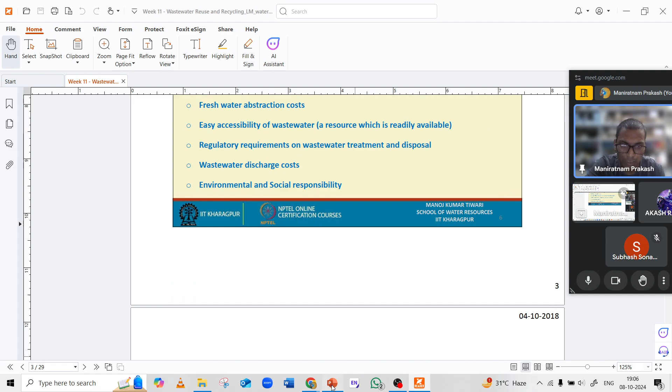Let's go through each and every topic. The first thing, what is the concept of wastewater? If you have any kind of doubt, you can ask in the chat box, or you can unmute yourself and start speaking.

The concept of wastewater reuse and recycling focuses on utilizing treated wastewater as a resource rather than discarding it as waste. Reuse itself means we are not discarding that water, we are just reusing it for some other purpose. This practice aims to address the growing pressure on water resources by reusing water for various purposes, thus reducing the overall demand for fresh water.

We know that for a particular area, they are either dependent upon some kind of river or upon the aquifer present in that area. Those resources have limited water, we cannot always rely on them. So we have to find an alternative, and we know that we generate a huge amount of wastewater just by simple use.

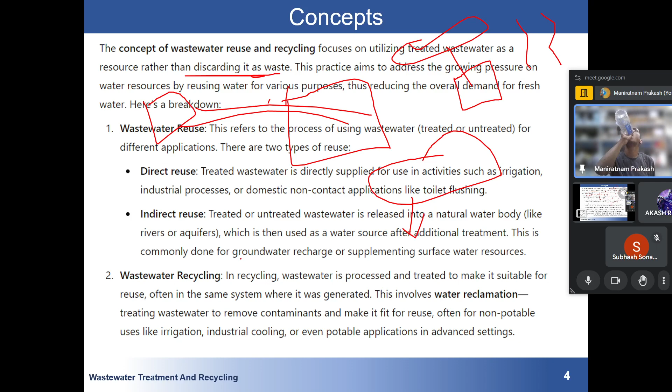So all these are connected, you have to connect the dots, like why we are recycling, why we are reusing. Simple answer is that we have limited resource of fresh water, and many activities starting from drinking to irrigational or agricultural purpose use this fresh water, so there is huge pressure on it. So we have to do something, and the best way is recycle and reuse.

Purpose: to conserve water, reduce pollution, and manage the growing demand in agriculture, industry, and domestic sectors.

Treatment level for recycling often requires multiple stages such as preliminary, primary, secondary, and advanced to meet the standard for different applications. Suppose we want to treat for agriculture purpose, then there is no need of such advanced treatment. But if we want to treat for drinking purpose, then we have to meet some other standard, and a high degree of treatment is required.

So you just remember, you have to keep two three things in mind. One, there is a guidance - first you have to identify the problem, like what is the final purpose of treatment. So our problem statement will be that we have to reuse our water for agricultural or irrigational purpose. Then we have to go through the norms set by the pollution control board or agricultural board, whatever is applicable, and we have to treat our wastewater according to that rule and regulation. So depending upon that, we will have different levels of treatment.

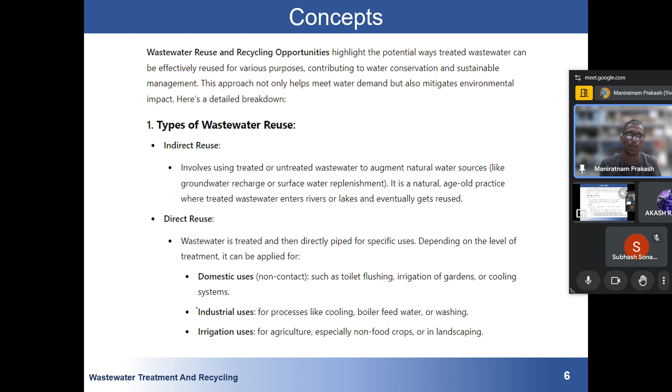Then there is industrial use for processes like cooling, boiler feed water, or washing. Irrigational use is for agriculture, especially non-food crops, or in landscaping. So there are different ways where we can reuse our water.

Potential areas of application - we have discussed which kind of water can be recycled. It's not like every kind of water can be recycled. So the most common recycling done, not just in India but everywhere, is of grey water - water which comes from non-toilet sources, because a huge amount of grey water is being produced.

So organic content in these waters is very less, and we're not talking about urea or toilet waste here. This makes it ideal for reuse. A huge amount of grey water is produced, and this is the easiest form of water to recycle.

Then we have municipal sewage water. We know that it contains a huge amount of organic waste. Municipal waste requires a higher degree of treatment but can be effectively reused in agriculture, landscaping, and even some industrial purposes. While it poses more challenges due to higher organic matter and pathogens, it can be significantly reused when appropriately treated.

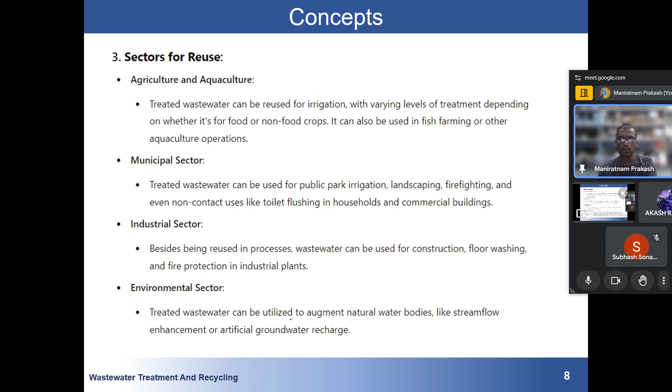Then another point: opportunity with treatment. If we reuse water, it can be used for agriculture purposes, for both food and non-food crops, among other places where wastewater can be reused.

Benefits of wastewater reuse and recycling include pollution control, water conservation, cost saving, and sustainability. Reducing wastewater discharge into natural water bodies helps control water pollution. Water conservation provides an alternate water resource, reducing the demand on fresh water supply. Cost saving - recycling treated water can reduce costs associated with freshwater procurement and wastewater discharge. Sustainability - it contributes to sustainable water management, particularly in water scarce regions.

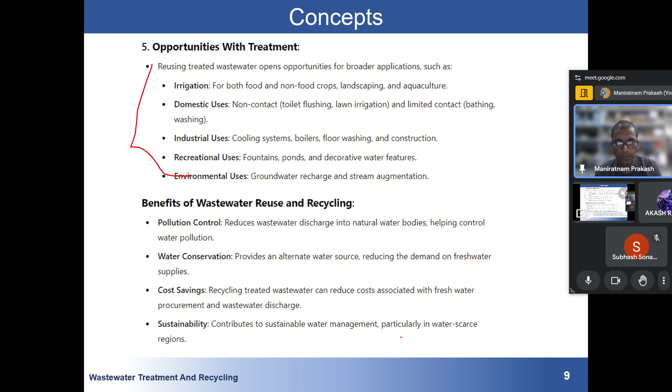There was no numerical question related to this topic originally, but I took an internet source and tried to generate one question. We will go through a cost comparison, depending upon the efficiency at different plants, how much is spent on fresh water versus wastewater treatment, and which option is better.

So an industrial facility produces a certain amount of wastewater which is treated for reuse in three stages. First is primary treatment, and water is collected from here for reuse, then secondary treatment where water is also used, and tertiary treatment, after which some water is also used. The plant aims to reuse as much water as possible for its processes.

So they just want to reuse as much water as possible. For that, they have constructed a primary treatment with an efficiency of 85% in reducing suspended solids and larger particles, and 15% of the wastewater volume is lost in the form of sludge. We know that every time, sludge is produced, a combination of solid and liquid - so out of the incoming water, 15% is converted into sludge.

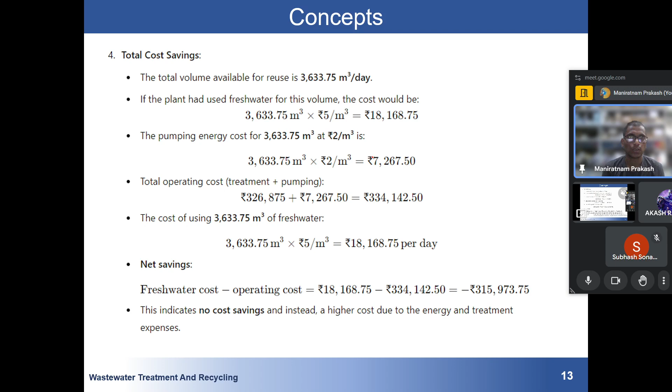So there are several ways to optimize it. Either we can decrease the operating cost, or we can increase the freshwater cost, and things like this. These are something we have to look into.

Coming to another topic, that is potential - we have already seen why it is required, and the answer is simple: we have a limited amount of fresh water. The potential for wastewater reuse and recycling is immense, particularly in regions facing water scarcity or high demand for non-potable water. However, successful implementation depends on meeting several requirements that ensure safe, efficient, and economically viable reuse. Here is a detailed breakdown.

We will be looking into different aspects of why it is required, or what is the potential for wastewater treatment. In India, for example, nearly two-thirds of sewage is discharged untreated, representing a vast untapped resource. Globally, the amount of wastewater generated is substantial, making it a promising candidate for water reuse. Theoretically, 80 to 90% of water used in household, industry, and agriculture can be recovered as wastewater after accounting for losses during treatment, and 70 to 80% of this water can be reclaimed for reuse.

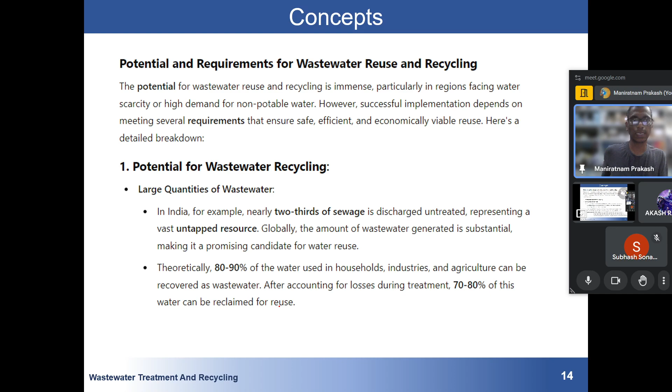So we are producing a huge amount of wastewater, so instead of depending upon fresh water, we can always look into recycling. We know there is need for agricultural purpose, industrial purpose, and municipal purpose. So instead of depending on fresh water, we can just reuse our wastewater.

Treated wastewater can be reused for landscaping, agriculture - we have already seen this.

Another potential of wastewater is environmental benefits. Suppose there is a lake beside your home, and you are discharging your wastewater into that lake. After several years, maybe 2 or 3 years, you will start realizing that the condition of that lake is not so good - it's being degraded. That's why it is always suggested that whenever you are discharging, just treat your wastewater, or reuse that wastewater after some kind of treatment.

Recycling wastewater significantly reduces pollution by preventing untreated wastewater from being released into rivers, lakes, and other natural bodies. We all know that if untreated wastewater is thrown into lakes, then something called eutrophication might happen. We don't want that, because it will degrade our lake with time. It contributes to environmental sustainability by augmenting water resources like aquifers - it also helps in recharging our groundwater.

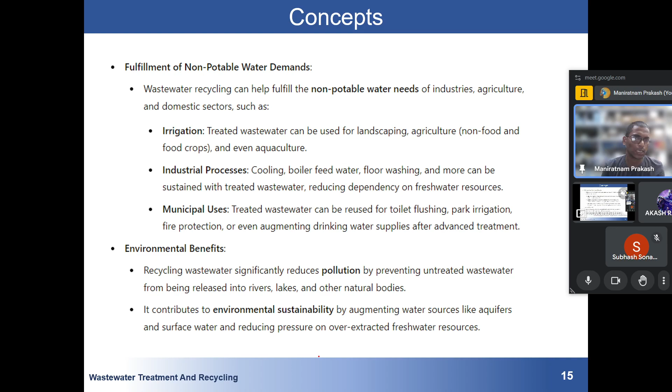Another thing is why it is required. Initially we were discussing potential, like if we treat water, then what we can achieve. Then another question is, what is the requirement? The requirement for wastewater recycling - first, it should meet water quality standards.

Suppose we decide that this water will be used for drinking purposes. Then we should define what treatment is required - at what degree of treatment should we go so that the water can be reused for drinking. Appropriate treatment for wastewater must meet a specific water quality standard for the intended use. Different applications, like agriculture, require treating in that particular way, and whatever instruments or facilities are required to treat water for agricultural use must be available.

This may require different levels of treatment, ranging from secondary to tertiary treatment. There are regulations and guidelines from bodies like the pollution control board, government, and international organizations like WHO and US EPA, which set strict regulations for water use, ensuring public health and environmental protection. For instance, WHO guidance states that if you treat your wastewater and want to reuse it for some particular purpose, it should meet certain guidelines.

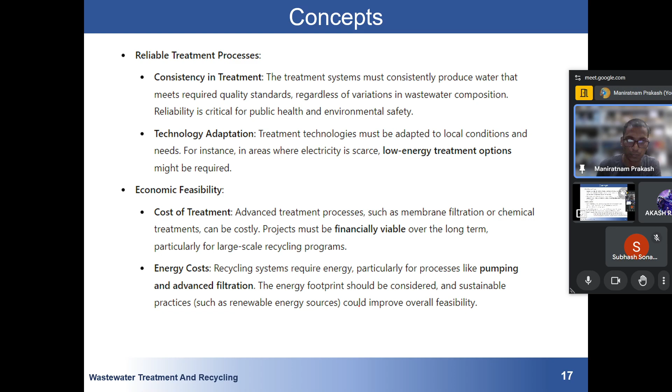Economic feasibility should also be there. Advanced treatment processes such as membrane filtration or chemical treatment can be costly. The project must be financially viable over the long term, particularly for large scale recycling programs. We have seen an example where the treatment was not cost effective. Energy cost means that a huge amount of energy should not be wasted. Recycling systems require energy, particularly for processes like pumping and advanced treatment, so the energy footprint should be considered. Sustainable practices could improve overall feasibility.

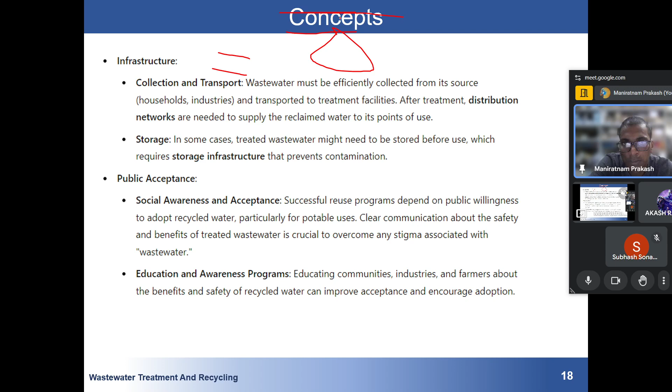After treatment, there is another requirement - infrastructure. Wastewater must be efficiently collected from its source and transported to the treatment facility. After treatment, distribution networks are needed to supply the reclaimed water to the point of use. So there should be either a pipeline or a proper canal beside the agricultural field so that water can be easily circulated from the channel to the field. In some areas, treated wastewater might be stored before use, which requires storage.

Another problem with wastewater - suppose someone tells you that wastewater produced at your home will, after treatment, be supplied back to your home for some purpose. Generally people avoid these things. This is just a mentality of people - they just don't want to accept it. So there should be public awareness that water which has been treated safely can be used without any hesitation.

Suppose I plan to treat water for drinking purpose, and when we supply it, nobody is using it—then there is no point of treatment. Now suppose in a village I constructed a treatment plant for irrigation purpose, and people are not using that water just because it was wastewater. Even though it is treated wastewater, people still don't use it because at some point that water was wastewater. So social awareness and acceptance is needed.

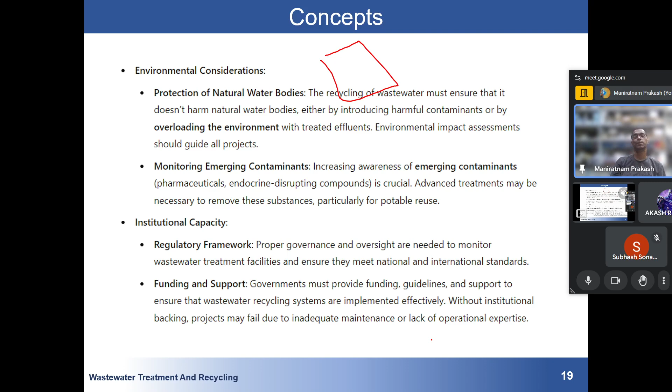Funding and support: the government must provide funding, guidance, and support to ensure wastewater recycling systems are implemented effectively. Without institutional backing, projects may fail due to inadequate maintenance. Proper funding should be there, or else there will be no maintenance cost and we might face a loss.

Here is an example of requirements in a municipal sector wastewater recycling project. For a city aiming to recycle municipal wastewater for park irrigation and industrial use, the project would need a treatment plant capable of producing water meeting the required standard for irrigation purposes. Then pipelines should be there to transport the treated water to public and industrial zones, along with public acceptance campaigns and regular monitoring.

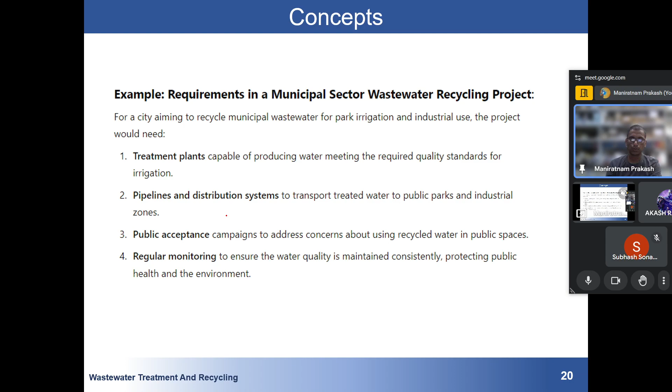We know there are different agencies: WHO, the World Health Organization; US EPA; and in India, we have CPCB. Now we will look into the different regulatory guidance for wastewater reuse and recycling.

Guidelines for wastewater reuse and recycling ensure that treated water is safe for public health, meets environmental standards, and is fit for its intended application. These guidance are developed by international organizations like WHO, US EPA, as well as national and regional authorities. Here is the detailed explanation.

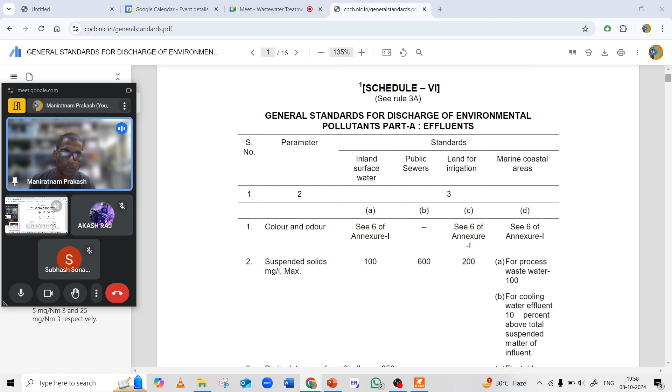See here, now suppose there is some treatment plant. I hope you are all able to see my screen. So suppose if there is some treatment plant, the wastewater can either be discharged on surface water, or discharged in public sewers, or used for irrigation, or discharged into coastal areas.

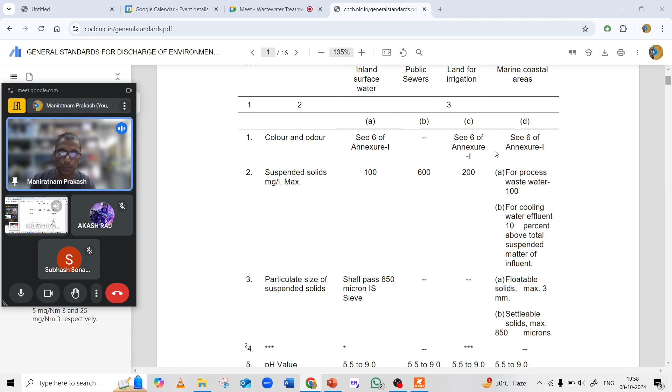For that, there is a parameter for each and everything, like starting with the color. There should be some particular color, then the amount of suspended solids should be this much. If I'm talking about irrigation purposes, the maximum suspended solid should be 200 milligram per liter. Then pH should be between 5.5 to 9.

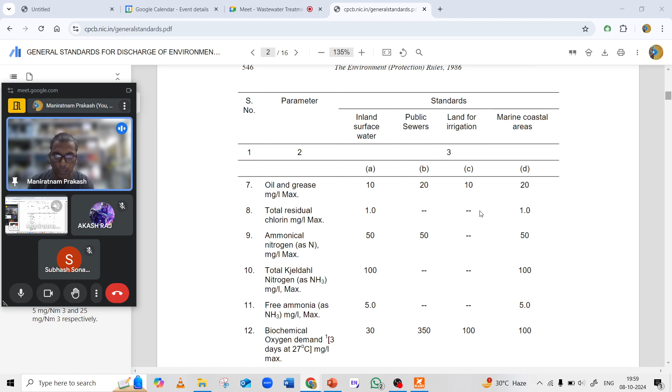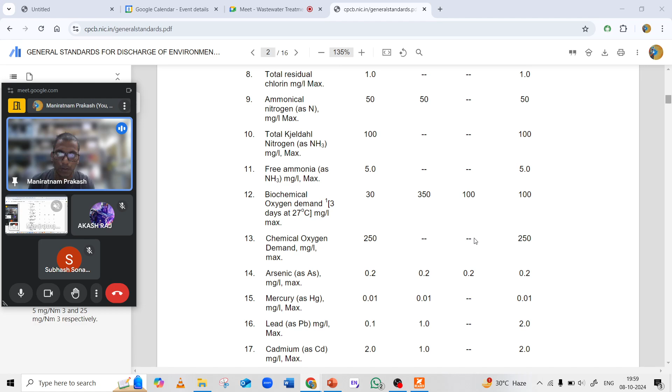For irrigational purposes, BOD should not be more than 100. There should be some limit for COD also, because if BOD is there, then there should be some COD also. Arsenic should be this much. So you can see there is a limit for each and everything. If that is being maintained, then that water can be discharged into that particular area.

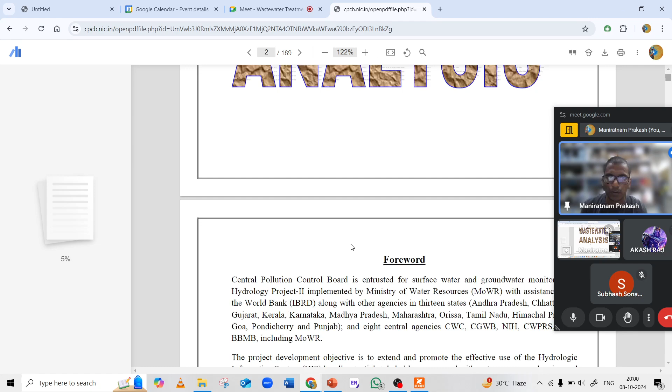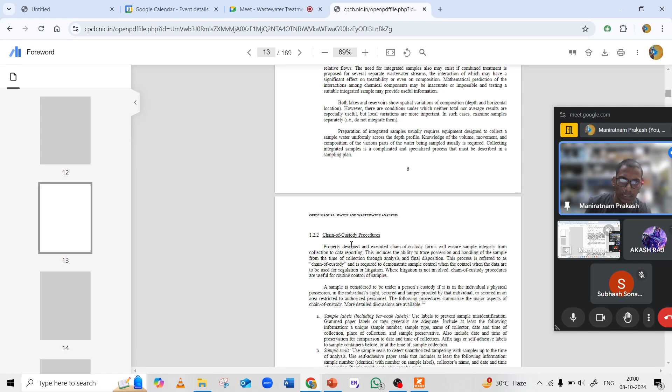It is generally followed in some places, but not in others, so it's all dependent. There are many reports you can check for guidance and analysis. This is also a report by CPCB. I think this report shows how samples were collected and how different analyses were done.

Similarly, we have zero liquid discharge, ZLD policy, enforced in many industries, particularly water-intensive sectors like textile and pharmaceutical. This mandates complete reuse of wastewater within the industrial facility. The Ministry of Jal Shakti promotes water reuse in agriculture and encourages it. So these are three different bodies which regulate wastewater treatment in India.

Then in Australia, similar to India, they have the Australia National Water Quality Management Strategy, NWQMS, which provides strict guidance for wastewater reuse, focusing on managing water scarcity. Public health safety is prioritized. Please zoom the slide.

One minute. Is it okay? Most are different people, the layout is all different. Hello, the layout is different. Is it visible now? It is not visible. I don't know what to do. It's maximum, I have zoomed 100%. It should be visible now. It is very small. I will try to restart. Okay, now it is out. Just restart. Is it visible now? Yes, it is visible now.

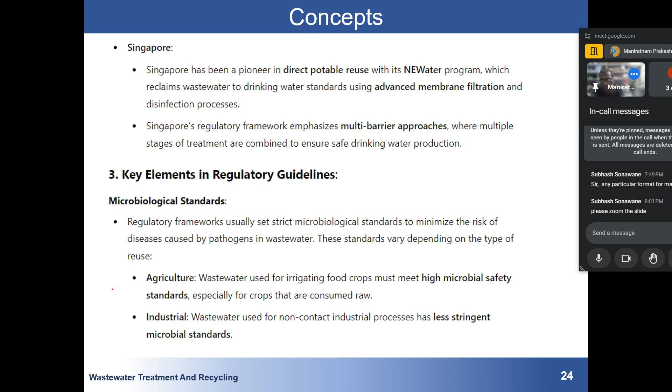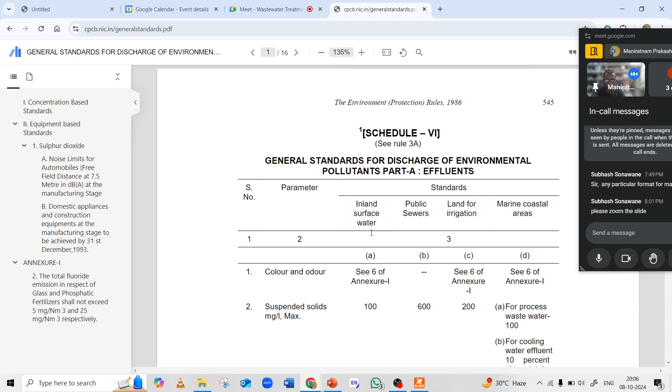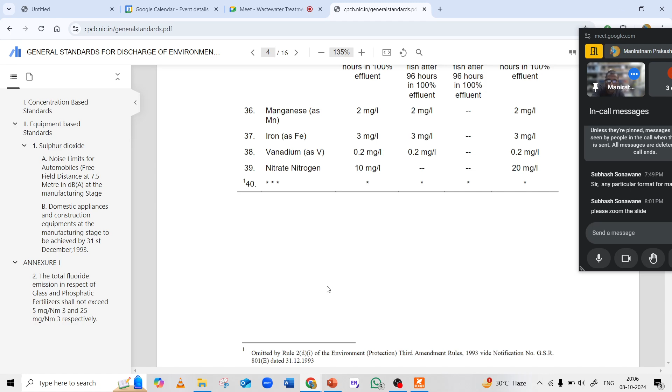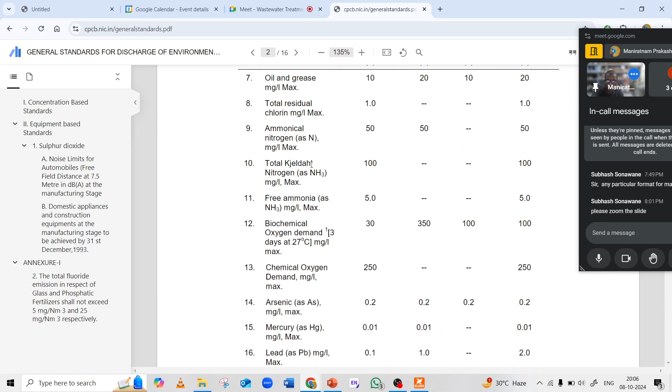In this report, you will see that depending upon the reuse, suppose I want to discharge water onto land or elsewhere, there will be different limits. For pathogens, it will be in the form of coliform. There's also a bioassay test - you can see 90% survival of fish after 96 hours, 100% for another case. I don't recall the exact coliform or cadmium figures, I might be looking at other forms, but remember there are limits for everything - if you are discharging, there is a specific limit that should be followed. There are limits on biological parameters also.

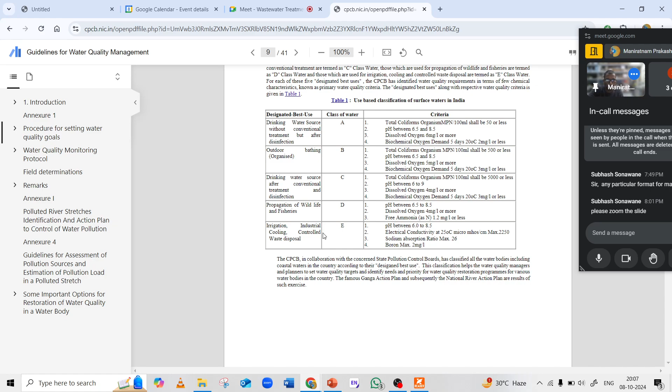Water quality parameters - I'm not able to find it right now, but you should have an idea that there should be some microbiological standards and these things.

Then we have chemical standards. We've already seen that several metals are present, like arsenic, chromium, cadmium, and these should not exceed limits because that will directly or indirectly affect human health. If soil gets contaminated, it will destroy the soil also. We've also seen that nutrients, the presence of nitrogen and phosphorus, will cause eutrophication. Then persistent organic matter can accumulate in the food chain, posing long-term environmental and health risks. So this is another problem - some chemicals get accumulated and cause further issues.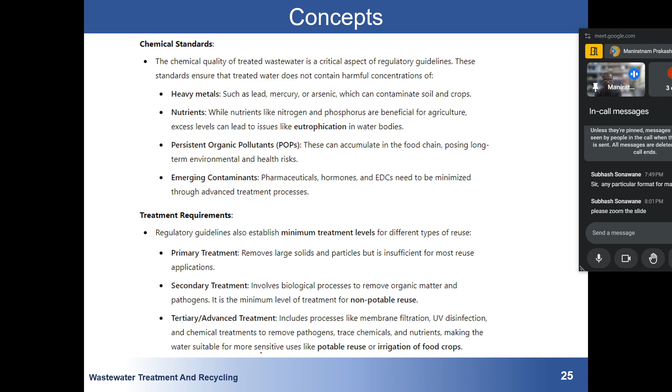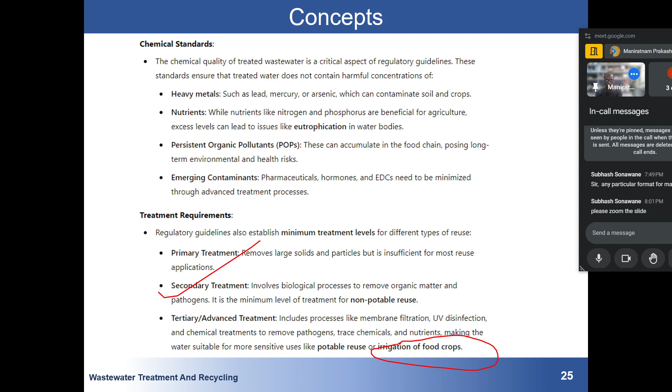Then treatment requirement - we've already seen primary, secondary, and tertiary treatment, depending upon the kind of use. Generally for non-potable use, where we don't want to drink but just discharge for irrigation purposes, secondary treatment is usually sufficient. For irrigational crop products, you can see there is tertiary treatment, but that also depends on what kind of crop is there. So it's all relative.

Again, we have discussed that people should be made aware that this water can be reused, and there should be institutional capacity for reporting, so one should always be checking that wastewater is being treated properly or not.

Now coming to this important topic: centralized versus decentralized recycling of wastewater. As the name suggests, there will be a central recycling facility and a decentralized recycling facility, so I will go into both one by one. When considering recycling of wastewater, two primary systems are often discussed: centralized and decentralized recycling systems. Each approach has its own advantages and challenges depending on factors like scale, cost, environmental impact, and feasibility. Let's explore the key differences between the two, their features, and where they are most applicable.

So, centralized wastewater recycling system. A centralized system involves the collection, treatment, and reuse of water at a large scale treatment facility. Note the term large scale. Often located far away from the point of wastewater generation, it serves large urban areas, industries, and municipalities by managing the wastewater of an entire community. This is the most common setup we have seen.

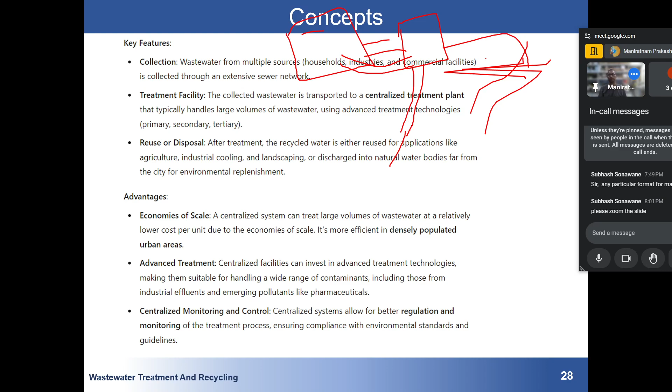Now, economies of scale - a centralized system can treat large volumes of wastewater at relatively lower cost per unit due to economies of scale. It is more efficient in densely populated urban areas. So we know that if there's a large population, this will be a good option.

Advanced treatment: centralized facilities can invest in advanced treatment technology, making them suitable for handling a wide range of contaminants, including those from industrial sources.

So as we know that when we are collecting a huge amount of waste, there are high chances that a large number of contaminants will be there in wastewater. So depending upon the funding, generally they have enough money so that they can treat their water at an advanced level.

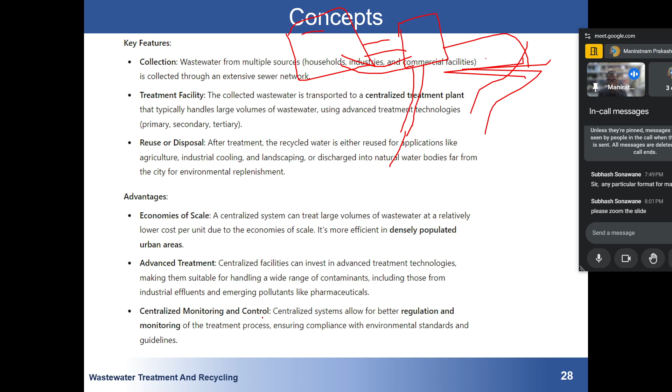Now, centralized monitoring and controlling should also follow some rules and regulations. Now there are disadvantages also. High infrastructure cost is there, so you can see, suppose for a whole Kanpur city, I'm just giving one example.

Like for your whole hometown, suppose there is a small village or hometown of 1,000 houses, at each house there will be some production of wastewater, and they get collected at one point. So treating that much amount of wastewater will be costly. A large amount of facility is needed, so building those facilities is challenging and costly. A huge amount of cost is required.

Energy: to operate the different units, a huge amount of energy is also consumed. Environmental impact: a large centralized system can have negative environmental effects. So we know that, these are all known to you.

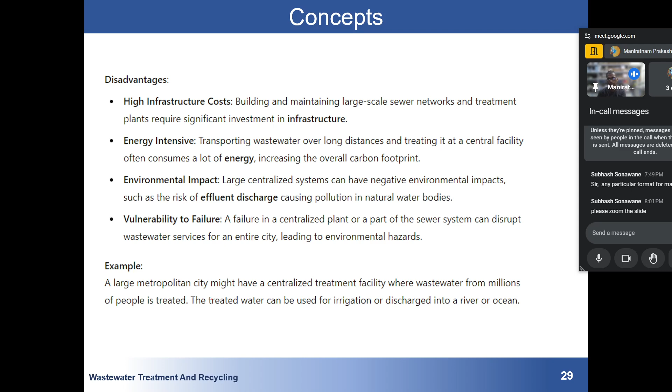Example: a large metropolitan city might have a centralized treatment facility where wastewater from millions of people is treated. The treated water can be used for irrigation or discharged into a river or ocean. Then we have decentralized. We have all seen this; key feature is on-site treatment.

Wastewater is treated close to where it is generated, either at household level or in a small community. Scalability: decentralized systems can vary in scale, from a small system serving a single household or building to a larger system handling the wastewater of a community or industrial park.

Localized reuse: the treated water can be reused locally, for example... we have seen all these things. Okay, now it will be the opposite of the centralized thing. As it is small, we know that we have to treat only my own waste, then there is no such cost investment.

So lower infrastructure cost: since decentralized systems do not require extensive sewer networks, they are less expensive to install and maintain, especially in areas with low population.

Flexibility: decentralized systems can be scaled up or down depending on the needs. So again, if you are treating for millions, you have to make sure - we have seen that first we have to do forecasting, and make sure that this much amount of water can be treated.

But for decentralized systems, no such thing is needed. We can just analyze that from my home this much amount of water will be discharging, this much amount will be going. So we can build depending upon those things.

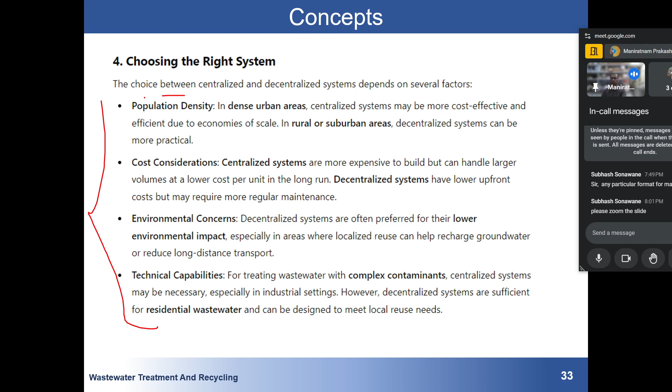So, depending upon these things, we can choose. The first option, and always the most important factor, is population. How much population is in that area? Then we have to look into cost, then environmental concern, and then we also have to look into technical capability.

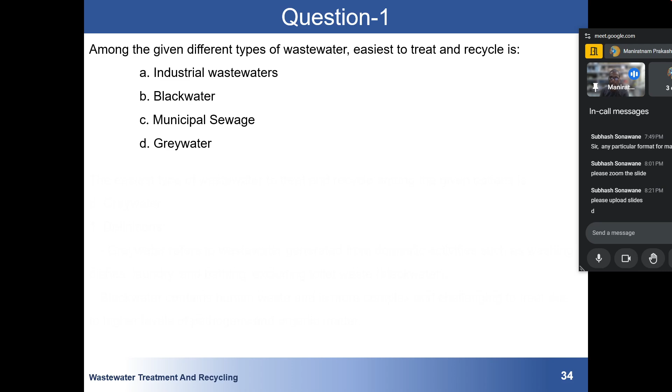Yes, D is the correct answer. We know that grey water contains very small, very low amounts of organic matter, so it mostly consists of inorganic matter. It refers to water generated from domestic activities such as washing dishes, laundry, and bathing, excluding toilet waste. Black water contains human waste and is more complex and challenging to treat due to higher levels of pathogens. So grey water is the correct answer.

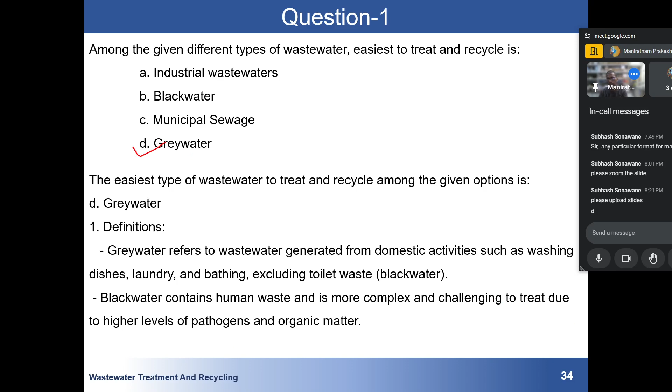Talking about the other processes, municipal sewage encompasses both grey water and black water, making it more difficult to treat than grey water alone. Industrial wastewater can vary greatly in composition, often containing toxic substances and high levels of pollutants, making it more difficult and costly to treat. For the treatment process, grey water can simply be treated by filtration, sedimentation, and biological treatment. Grey water usually has lower concentrations of pollutants such as bacteria and nutrients compared to black water.

Black water treatment requires more advanced processes, as we have already seen. So out of these four types of water, the point I want to make is that due to its lower contaminant level, simpler treatment process, and higher recycling potential, grey water is considered the easiest type of wastewater to treat and recycle compared to industrial wastewater.

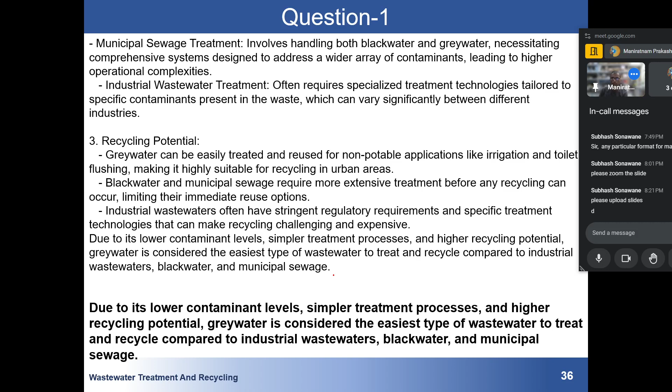Coming to the second question: the impact of wastewater recycling and reuse on freshwater resources includes... just remember, I have discussed each and everything, so this question should be answered very easily. The impacts include improved water quality of freshwater resources and reduced water withdrawal. What will be the impact if we start reusing? Is it both A and C?

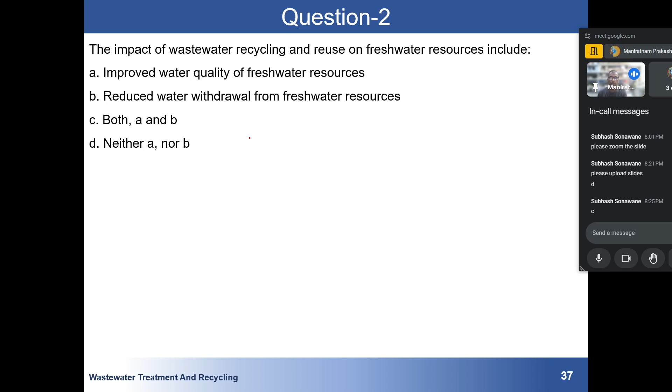Yes, correct. We know that if we start extracting less fresh water, then its quality will improve and the water withdrawn will be reduced. Obviously, since we will be using more of our wastewater, fresh water will remain as it is. The correct answer is both A and B, that is, improve water quality and reduce demand.

Improving water quality: wastewater recycling can reduce the load of pollutants entering the freshwater system, leading to improved overall water quality. Also, by reusing treated water for various applications, the demand for fresh water is decreased, thus reducing the withdrawal from natural resources. Therefore, wastewater recycling and reuse positively affects both the water quality and the quantity of freshwater resources.

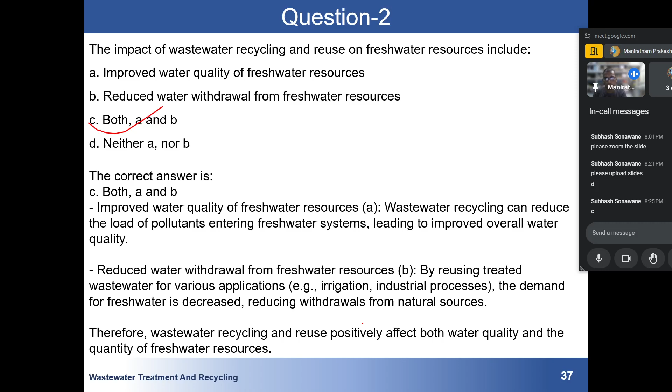Now, match the following - this we have also discussed: indirect use, direct contact use, and direct non-contact use. Try to answer it. What will be indirect use?

Match the wastewater use with their example. Indirect use involves groundwater recharge and similar applications. Indirect use typically involves using treated wastewater to replenish groundwater, hence it matches with B.

Direct use involves using treated water in a way that directly comes in contact with humans, such as supplying water to a swimming pool, hence matching with C. Direct non-contact refers to using treated water for non-potable applications where there is no direct contact with humans, such as irrigation, hence A.

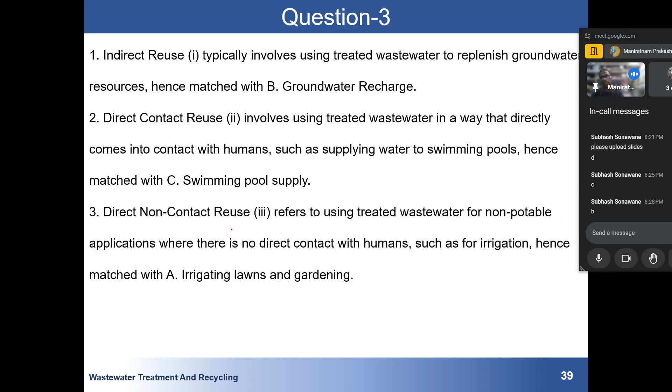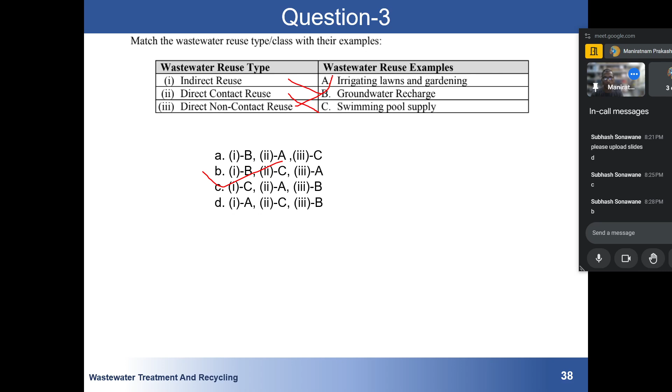So the correct answer is B, C, A.

Coming to the fourth question, try to answer it.

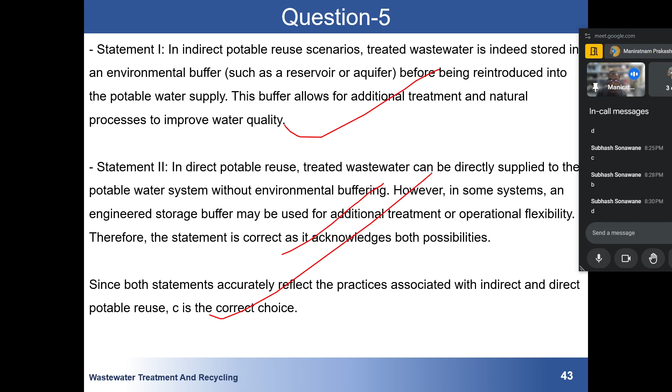So in direct potable reuse, treated water can be directly supplied to the potable water system without environmental buffering. However, in some cases, an engineered storage buffer may be used for additional treatment or operational flexibility. Therefore, the statement is correct as it acknowledges both possibilities. Since both statements are correct, the correct answer is C, both one and two.

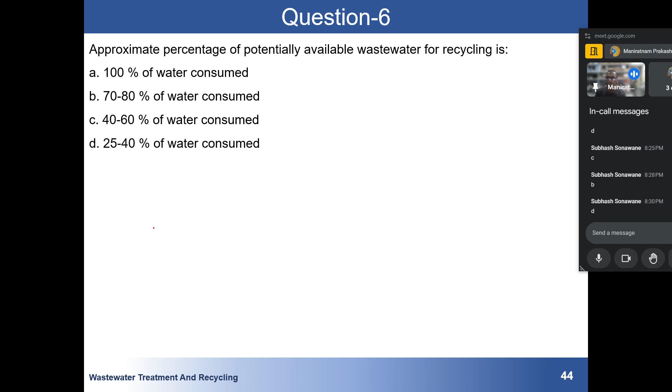Coming to this question, if you have gone through the slides, you can answer approximately what percentage of water is recycled - 70 to 80% of water consumed. This is like a knowledge-based question, no science involved. So the answer for this will be B, 70 to 80%.

Coming to question number 7, try to answer it. Guidance on the use of wastewater is released by...

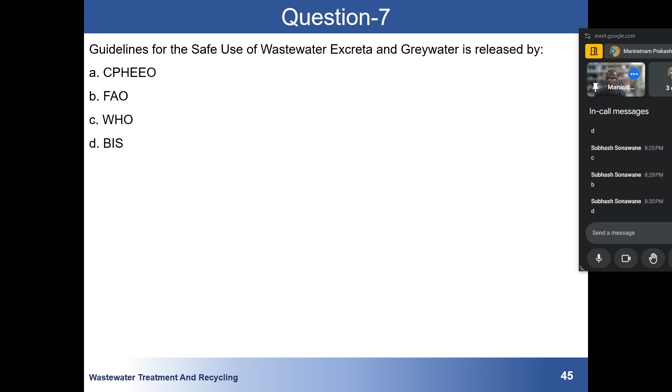So the correct answer is C. Okay, just remember what different organizations do.

FAO is Food and Agricultural Organization, concerned about food and agriculture. BIS, Indian Standard Code, has different standard codes for water, construction, and other things. Then there's CPHEEO, Central Public Health and Environmental Engineering Organization, related to health.

CPHEEO has its own purpose, but for wastewater, WHO has set some rules. So the answer for this question is C. This was also very easy.

Coming to question number 8: which of these pollutants is most difficult to manage when planning wastewater treatment for reuse application? Just go through it, this is also a very common question. I will be waiting for some time for the answer.

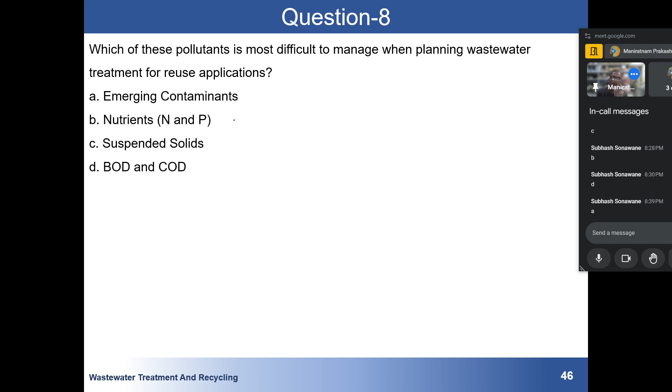Emerging contaminants include pharmaceuticals, personal care products, and other chemicals recently recognized as pollutants in the environment. They are often present in very low concentrations and can be resistant to conventional water treatment processes, making them particularly challenging to manage. Their effects on human health and environment are not fully understood, and specialized treatment methods may be necessary to effectively remove them.

For example, nutrients like nitrogen and phosphorus can cause problems, but they are typically more manageable with standard treatment plants. Suspended solids are handled by the primary sedimentation tank, and for COD and BOD we have secondary treatment. Overall, the answer is A.

Coming to question number 9: potential threats of reusing water without treatment for agricultural application.

I have not yet discussed something about SAR, sodium adsorption ratio. Let me show you what this sodium SAR is.

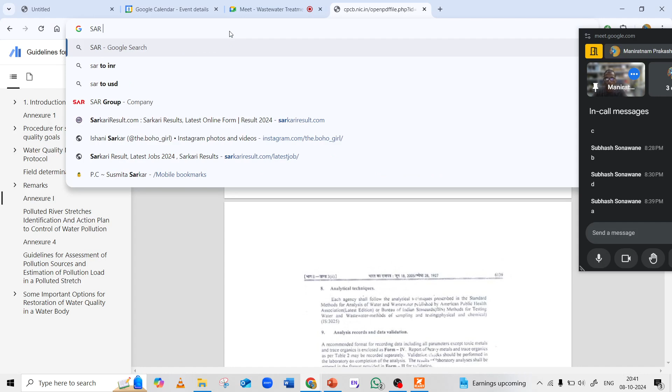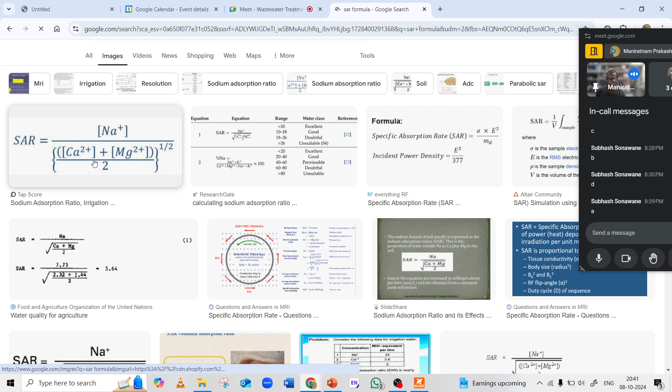This SAR, that is sodium adsorption ratio, is defined as concentration of sodium divided by the square root of (calcium plus magnesium) divided by 2. This is how SAR is defined.

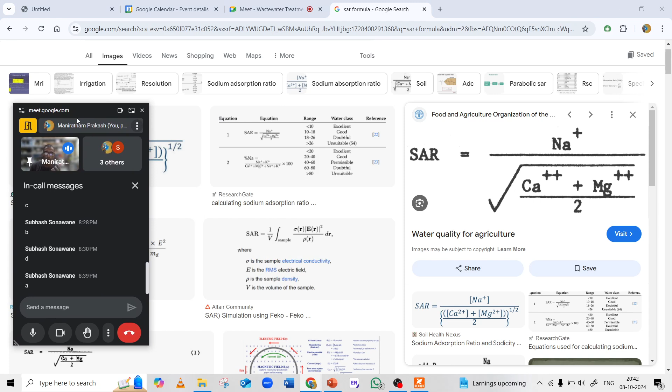The government has set some rules for water class based on this. If the SAR is less than 10, then the water is excellent and can be used for irrigational purpose.

If SAR is between 10 to 18, it is good. And if SAR is greater than 26, then that water cannot be used for agricultural purpose. So this SAR is used in the agricultural field.

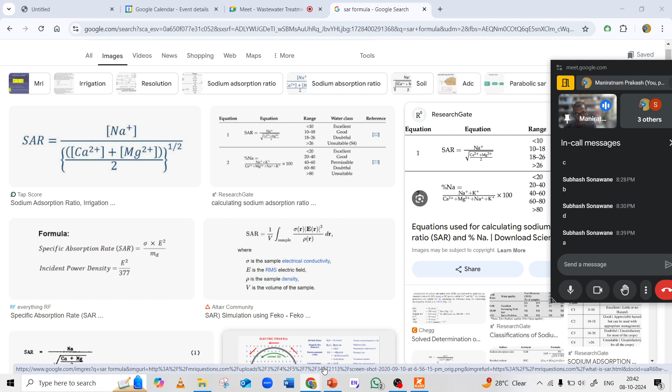This is just to define, I hope you have understood. Depending upon the SAR value, it is defined whether water can be used for irrigational purpose or not. SAR greater than 26 is generally not considered suitable for agricultural purpose.

So the question is: without any treatment, if water is being used for agricultural purpose, what problem can arise?

Option: surface loading could make the soil hydrophobic and water repellent. We know that oil and grease are present in wastewater, and if it is discharged onto agricultural land, it will make the soil very bad and it might not be productive.

Then, SAR ratio in soil may rise, making it unsuitable for agriculture. If water with high sodium content penetrates the soil, the soil will accumulate sodium, magnesium, and calcium, which overall increases the SAR value. If SAR is high, it is not good for our soil.

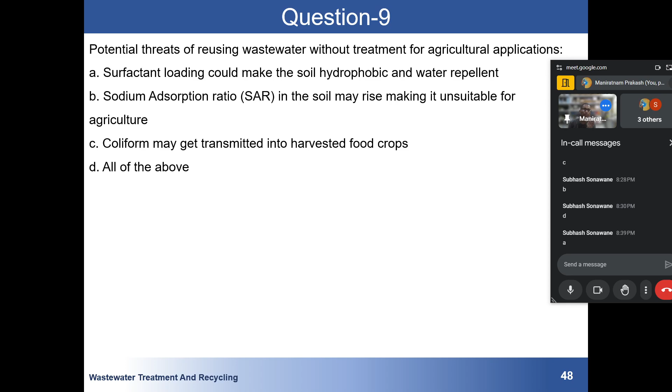So coliforms may be transmitted into harvested crops. Coliforms mean harmful pathogens, so pathogens may get transmitted into the soil and then into food, directly or indirectly contaminating us or making it not good for us. So the correct answer is D.

Whatever I have told you is written here.

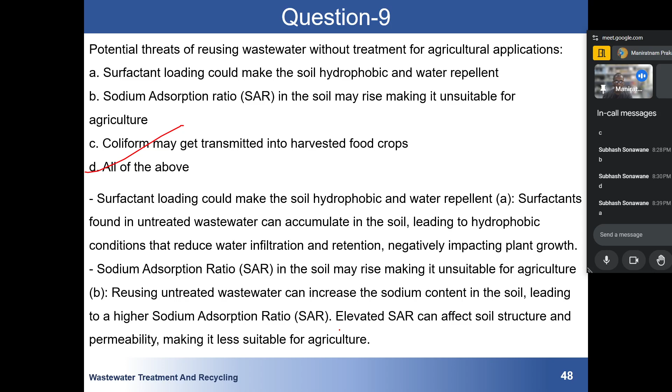It's written here that surfactant loading could make the soil hydrophobic, with surfactant accumulating in soil leading to hydrophobic conditions that reduces water infiltration, making it unsuitable for agriculture. Using wastewater can also lead to higher sodium content, which is generally high in our wastewater, affecting soil structure and making it less suitable for agriculture.

Coliform may get transmitted into harvested food crops. Untreated wastewater can contain harmful pathogens, including coliform bacteria, which can contaminate crops. Since all these points highlight potential threats associated with the reuse of untreated wastewater, D is the correct answer.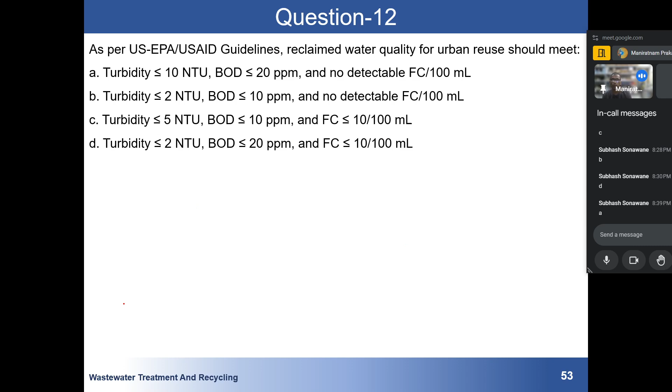The correct answer is B. This is something you should know: turbidity should be less than 2 NTU, BOD should be less than 10 ppm, and there should not be any coliform bacteria. This type of question generally won't be asked, but if it has been discussed in class, then it can be asked. So remember, reclaimed water for urban reuse should meet these parameters.

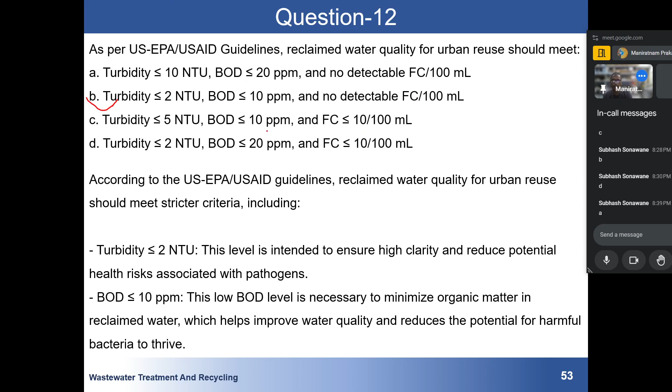Decentralized management systems are designed to treat water close to the point of generation, minimizing the need for long-distance transport. This is one of the key advantages of decentralized systems. Statement B is also incorrect.

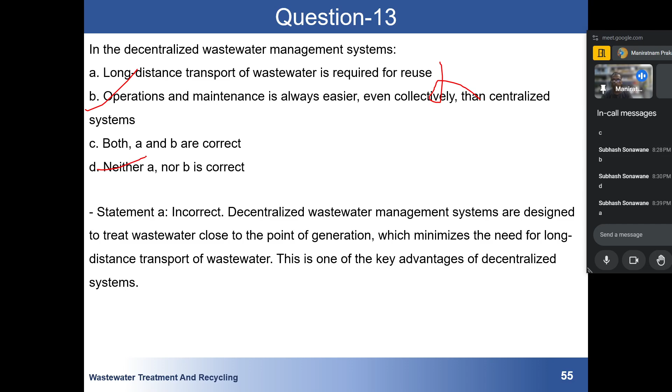While decentralized systems offer certain operational advantages, they are not easier to manage collectively than centralized systems. Factors such as community and environment play a role, so both statements are incorrect. I hope this is clear. The correct answer will be D - neither A nor B is correct. Both statements are incorrect, so D is the right choice.

Factors such as communities matter - obviously it is smaller scale, but it also depends on the people involved and whether the technology being used is something people are aware of or not.

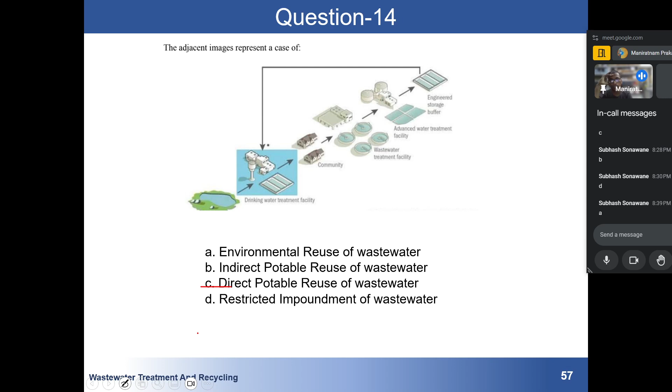Second-to-last question: the adjacent image represents a case where you can see a drinking water facility, a community, then wastewater is generated, goes through advanced treatment, and is then stored, and finally sent back to the drinking water treatment facility. This is an example of direct potable reuse of wastewater - after treatment, it's directly transported to the drinking water facility for further treatment before passing through the community again.

Last question of the day: match the wastewater reuse types with their correct examples.

Last question of the day, try to answer it: unrestricted urban reuse, restricted urban reuse, environmental reuse.

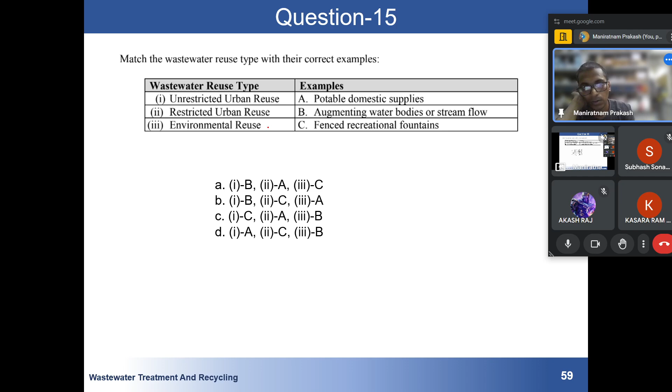I will be going by one option. Unrestricted urban use means potable domestic supply. Unrestricted urban reuse involves using treated water for potable purposes, such as supplying drinking water. This reuse is typically subject to strict treatment standards. So the first one will be matching with A.

Restricted urban reuse is where treated water is used in a controlled environment, such as a fenced recreational area or decorative fountains, to limit human exposure. So again, it will be matching with C.

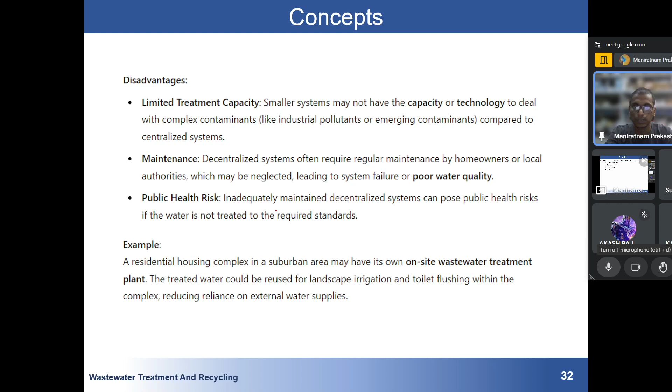Environmental reuse means augmenting water bodies or stream flow. These parameters were defined by US EPA. If you recall my lecture, we have discussed this: unrestricted use, restricted use, indirect potable, direct potable. So US EPA has defined all these terms.

So this one, environmental reuse, will be matching with B, augmenting water bodies. This means the wastewater we are treating is left into the water bodies for their own benefits, because once the water is treated we can discharge it into a river so that a sufficient amount of water is maintained in the river.

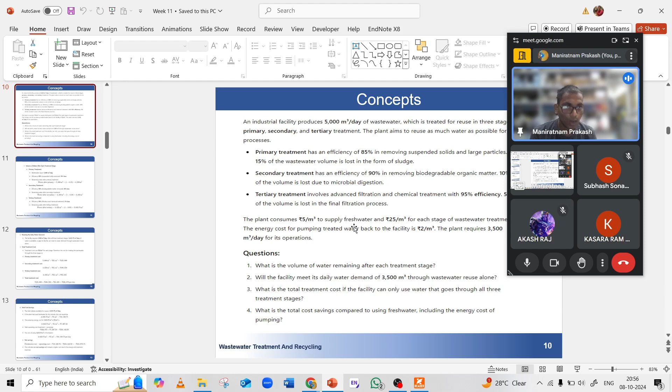If you have any question you can ask, or we can end the session. It depends - if by solving those assessments you have cleared all your concepts, the exam questions will be revolving around those topics only. It won't be any new question, there may just be a change of wording. But if you have solved every question during your assessment honestly, that is enough. If you have not solved those assessment problems honestly, then it will be difficult for you. It all depends upon your honesty level - whether going through the notes honestly is enough or not, I cannot answer that. But if you have solved all the assessment problems honestly, I can surely say that is enough. You don't have to go further. You can expect similar type of questions, no new question will be there.